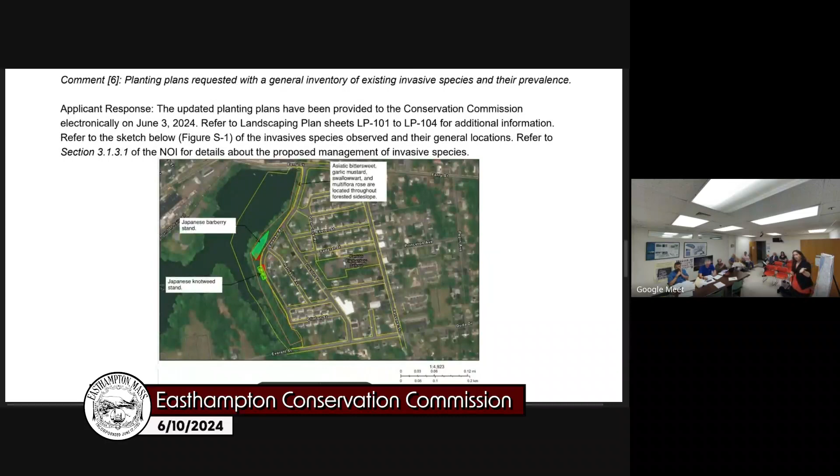Planting plans were requested with a general inventory of existing invasive species and their prevalence. Here we have 2 areas with larger concentrations of invasive species: the Japanese barberry stand in green, and the Japanese knotweed stand in lime green. Honestly, the rest of the slope has a lot of invasive species in it too, including Asiatic bittersweet, garlic mustard, swallowwort, and multiflora rose, located along the entire path of the forested side slope.

So there will be an aggressive management of those invasive species with replacement by native species.

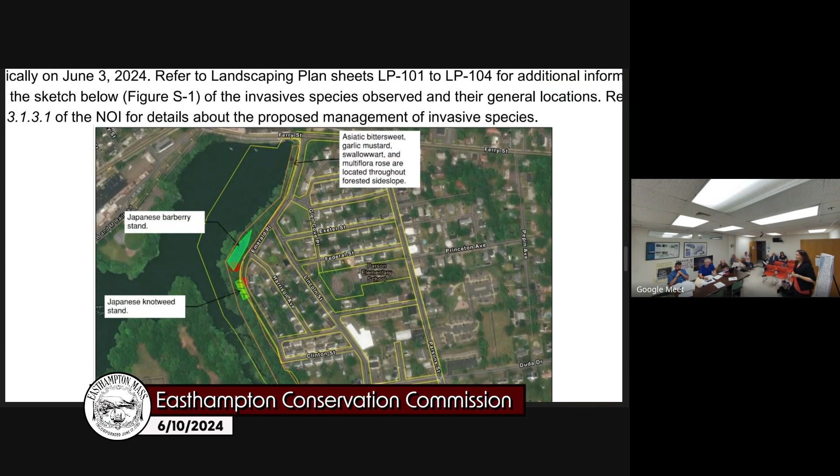Yeah, thanks. No, you're fine. Zoom back out a little. There we go.

And then the snow storage plan. Right now, under existing conditions, the city is trucking snow in larger storm events from this bank so people can park here, bringing it to this apartment parking spot and placing it in the center. That will remain under proposed conditions, because there is no other feasible location along this roadway for significant storage.

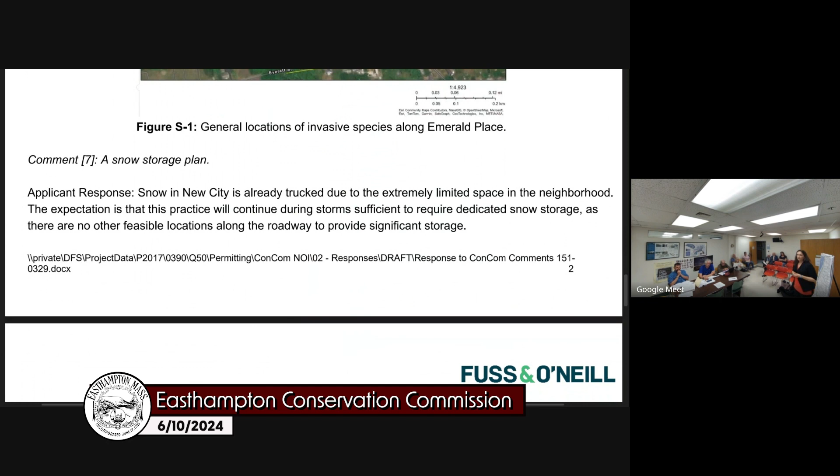And then Cassie, if you want to scroll down a little bit. Yes, I feel like there's a little bit more to that. Nope, there's not. Okay.

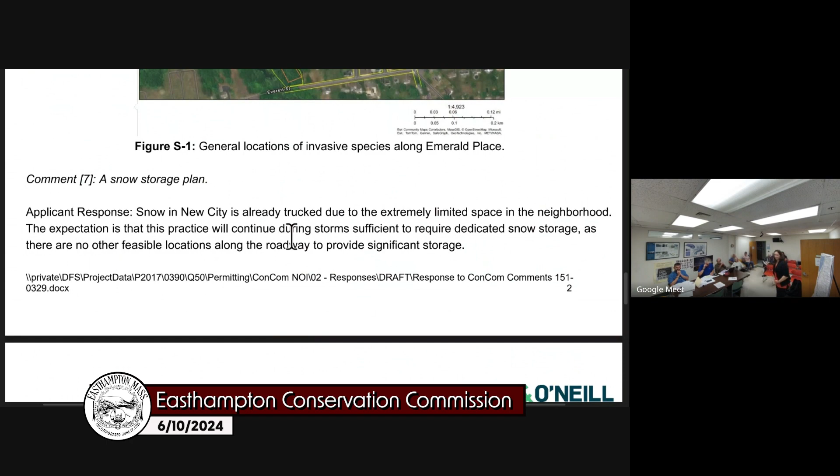Okay. I think that covers most of the questions that we had, right? There was one other question about ADA compliance and dam safety. Was that something that was...

I remember, if I can, someone had asked if the new bridge, because they're proposing a pedestrian bridge along Ferry Street, if it would be ADA compliant and how up and over it would be. I think maybe Sarah, you had asked about that potentially. I don't remember, sorry, but I don't know if you want to speak.

So no problem. Yes, the bridge is definitely designed to be ADA accessible, and it will be in the same time period as this June 30th deadline. We will also be applying to the Office of Dam Safety. We've had pre-application meetings with them already to go ahead and request that permit. There are no negative impacts to the dam, which was the issue that was discussed. So yeah, okay, that's it.

Any other questions from commissioners? Well, let's see, so the drainage report now, do you want to just walk us through the drainage things? We're at 75%. We have the report. Yes, so I'm going to start from the north.

I just realized these are, I guess I'll do it the way we've been doing it. So here's the north, right? So Emerald Place, and we have the multi-use path, and that's the bridge. We've also elevated it, thinking about stormwater, above the base flood elevation so that we're staying out of FEMA regulations.

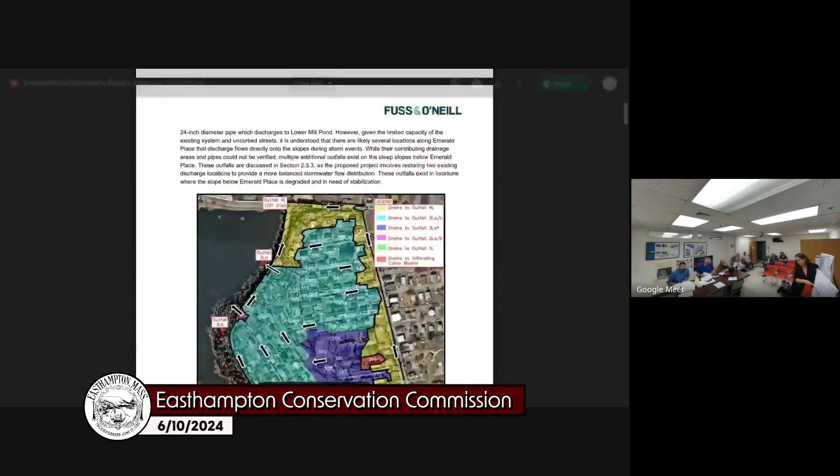So all the yellow, as I go down the road, is stormwater. This stormwater is heading towards Ferry Street as it does today. And then this orange here is the soil nail wall, and you can see it's only extending 12 feet, whereas before it extended all the way to the base.

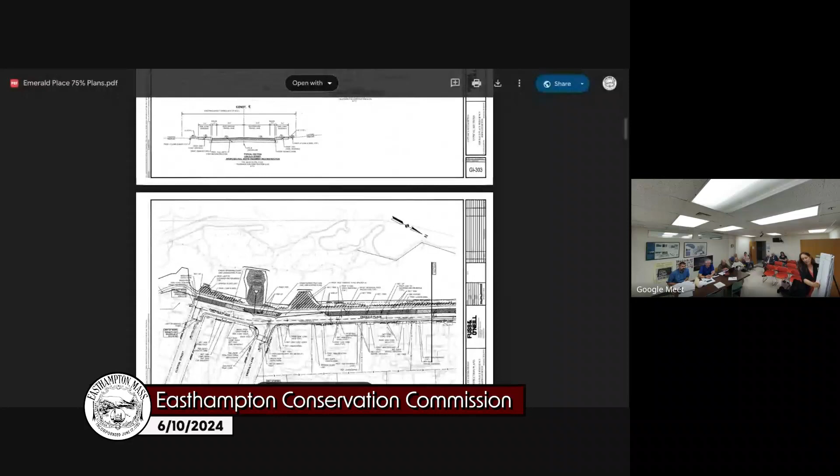And then from the south, this portion from Lincoln Street is going to be collected along this new storm sewer and then draining into this existing outlet. This existing outlet control storm sewer is a 24-inch, and though it's not labeled here, I believe it's a 36-inch that we're putting in. We're upsizing that for increased runoff from future conditions for 2070 flows. Moving farther down along the street.

So the yellow is a little bit easy to see here. We're kind of thinking about this watershed, this smaller sub-basin right here.

Now the next sub-basin is going to be one of the new energy dissipator pools we're proposing, a set of rock boulders that go along the slope here. That's this watershed right here, with new stormwater pipes or storm sewers draining to this new rocky outfall. There's an existing 12-inch pipe there today that we'll be replacing. This is where the slope is already seeing a very large gully with significant erosion, so we're formalizing that outlet.

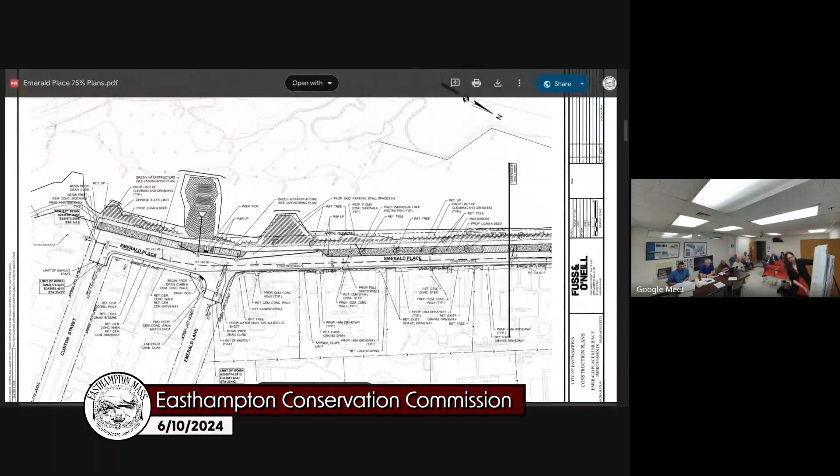Moving farther south, we have the first of our... this is also heading that way. We have a bioretention area here. We are not infiltrating along the side slopes because they're steep, and it's not recommended to infiltrate on steep side slopes, but we are going to be slowing down the water and treating it, then allowing the overflow to go back into our storm sewer. So that one's heading to the north.

And then here's that third watershed system. There's two bioretention rain garden areas right here next to the formalized outfall. And then here's the new stormwater.

This area is where the city has experienced washouts and a significant pothole—well, a sinkhole—right here along the side of the road. It's because there's a significant amount of water coming from Clinton and Emerald Place, Emerald Lane, and there is no formalized location for it. So we're hoping to slow down the water here, and knowing there will be significant velocity, we're again proposing these step pools.

So that's kind of the overview. We've sized all the storm sewers for the 2070 10-year storm event. We've run HydroCAD analysis for many different storm events, from the 2, the 10, the 50, to the 100, for both existing conditions and 2070 flows, to show that we're meeting the stormwater standards and reducing or meeting those flows.

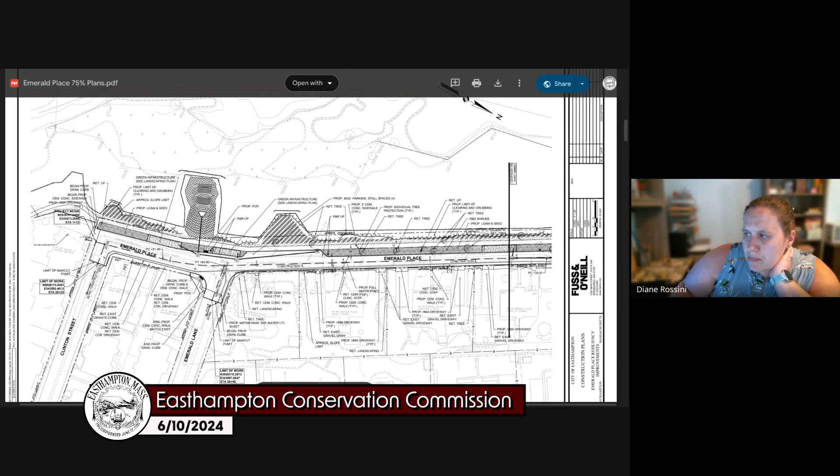I think you're looking for page 11 of the PDF. Okay, hold on, let me see. It's the rock cascade and energy dissipation pool design profile. No, we're looking for a detail though. That is what we got. Okay, hold on, I can share this. So it's page 11 of the PDF. Thank you.

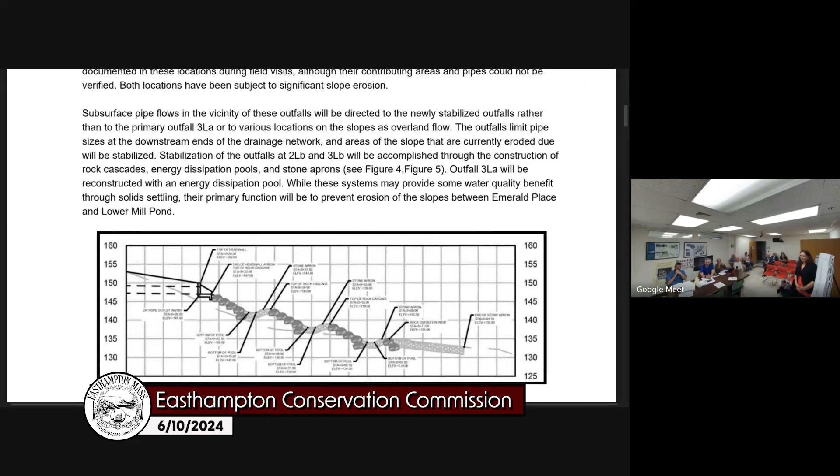Oh, here we go, got you. I was looking at the wrong thing. Let's see when we zoom in how fuzzy it is. But you can see here, the idea is that you have these boulders coming in as the flare down section comes. You've got a cascade pool, or settling pool, and then the rock cascades, and then a stone apron at the bottom.

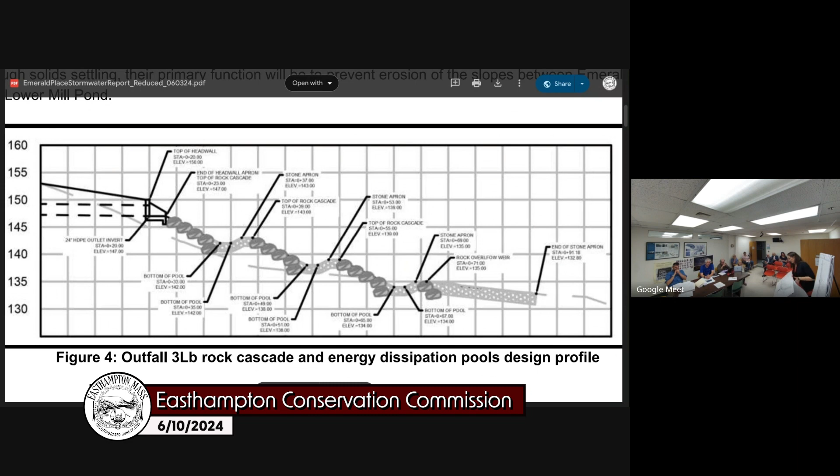So like the one we're looking at now, there are a couple that are similar, but this one is where the many steps is really big. Actually, I believe this one is only 2 steps, which is interesting, but that's because we've formalized this and will have a larger storm sewer here. The other one that's farther north has 3 steps, which I think is what we're looking at here, at the bend, just south of Harrison.

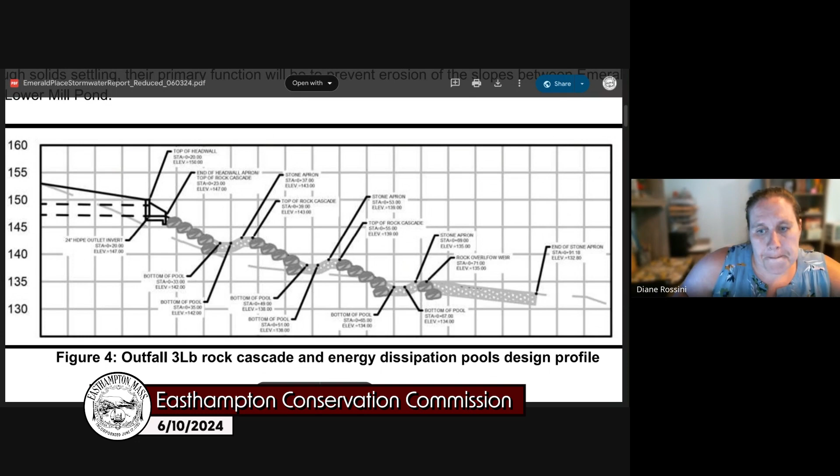Anything else? So at this point it's nearing final-ish design, then the funding is done, then it's the city applying for more grants and figuring out how to finish it, and bid it, and what phasing and all that sort of stuff.

I guess if we were to, we need to rough out some conditions also. I don't know, Cassie, if you have conditions already in mind, but the ones we typically like to discuss are monitoring during construction, which the commission typically requires - a third-party monitor or a monitor proposed by the project as a pre-construction requirement. We figure out who that person is, make sure they have the proper credentials for SWPPP inspections, and then that they would do weekly monitoring and after every 0.25 inch rain event.

What's that, sorry? There's weekly monitoring. Yeah, usually it ends up being weekly anyways, so those two things, and then...

I'm thinking about if there are changes that happen in between this design submission and what goes to bidding and construction, and also just making sure the commission's in the loop on what the phasing is and those kinds of things.

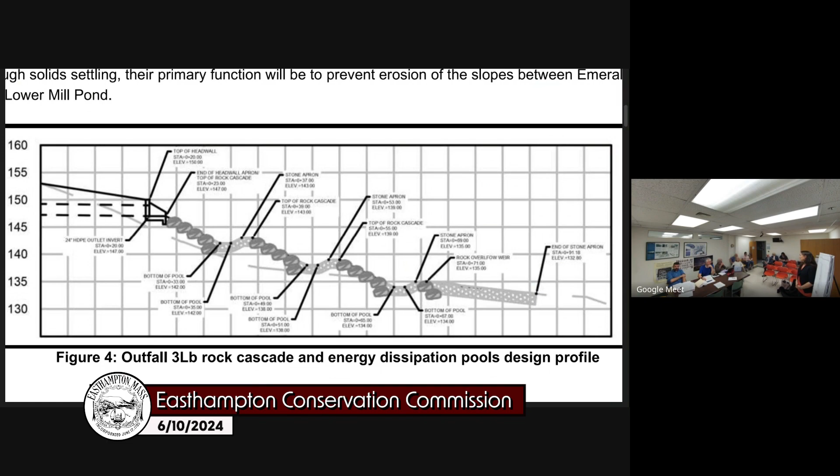So you're applying for some funding at the end of June? Diane, do you want to speak to the funding sources? Funding wise, no and yes. End of June is when this MVP grant is up. The next MVP funding round application will be due next spring, so we'd be applying then. Hopefully we'd get some MVP funding and try to pair it with maybe some CDBG funding or other sources, but a lot of those grants we'll be applying for in the spring. So it probably wouldn't be next construction season, but the season after, if we get that funding, that's when we'd be starting construction.

Okay, so if we end up issuing something now that's for 3 years, they'll already be at least 1, if not 2, years in before you can even start it. And then how many — because you can ask for a continuation, an extension, right? Is it year by year at that point, or is it another 3?

I think it's year by year, right? You can do it every time the commission extends a permit — they can extend it for up to a period of 3 years, so you could get another 3 years. There's no limit on the number of times the commission can extend a permit either, so it's at your discretion how often you want to do that. We do have projects often ask for 1 year if they're close to the end, but in this instance, they'd probably go for the next 3.

So I guess what I'm wondering is whether it makes sense — I'll say that a lot of the funding sources are looking for permits to pretty much be in hand for the construction projects, just so they know they're ready to get constructed as opposed to having to go through the permitting process. That makes sense, yeah. That's part of why we did this now.

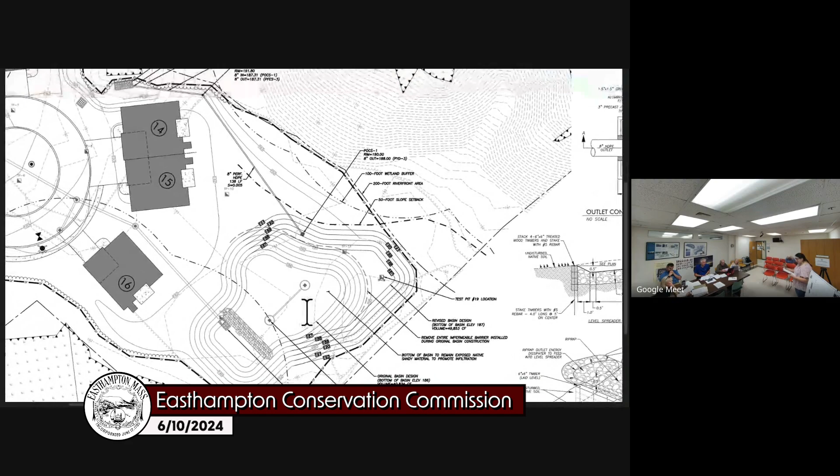So that was the original back and forth with the previous city engineer, but I know we've received final comment from the current city engineer based off of those responses. So that was great, they kind of... oh, sorry about that. Okay, I think it was good to review.

Since then, we have received from Diane Rossini that basically it looks like it meets the required standards. She has the following comments related to construction design on the system. Is my understanding that the fill to raise the grade of the basin to 187 will be a well-draining soil that will allow for infiltration. Also, for any work in the infiltration basin, care should be taken to minimize any compaction or introduction of fines that would impact the function of the basin.

Next comment was the basin should be protected during construction from any construction stormwater flow that would impact its functionality in the future. Next comment is the level spreader shall be situated and graded so that it can manage the velocity of stormwater flow effectively. Based on conversations, it is my understanding that there will be a stilling area within the level spreader that will be properly located and sized to do this function. The flows from this pipe should be relatively low, so this should be adequate from the energy dissipation required.

And then the last comment she had is the owner contractor should keep the city engineer apprised of the construction schedule for drainage work so that if she should so choose, she can come out and inspect the work.

Thank you. No, it's okay, sorry about that. That's helpful, sorry for that. Yeah, okay, yep, it was helpful.

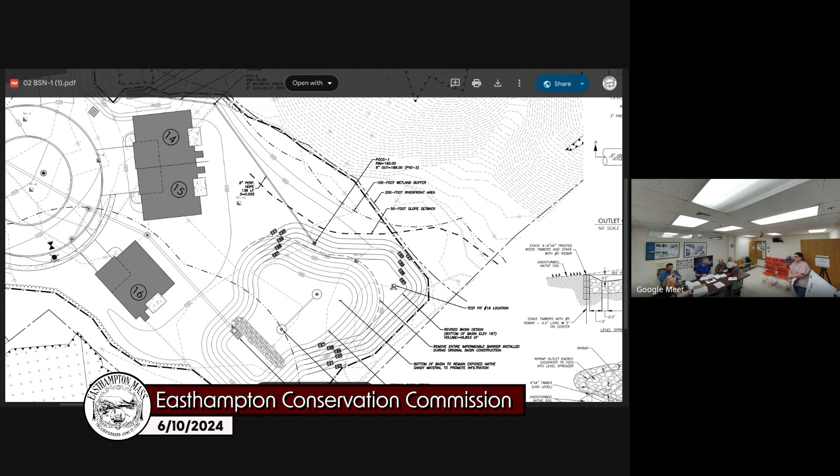Going back to one of the comments related to something we raised at the last meeting, about whether it won't have to drain - currently it has to drain 4 to 5 feet and will only have to drain 1.25 feet. The drawdown analysis was revised to show that using C-type soils per the Rawls rate provided in the stormwater handbook, it will drain less than the 72 hours required. Do you know how long that drainage time is? It was 71, I can look it up, but yeah, 71. Just barely. Yes, okay.

Do you still feel like it's appropriate to be a minor change? Yes, with administrative approval. Potentially, if you choose to accept it. Dan, any concerns from your side? No, I don't think so. It's a minor change. Okay.

All right, are we ready to go ahead and approve this for construction? I'm trying to get this thing functioning. Sure, okay.

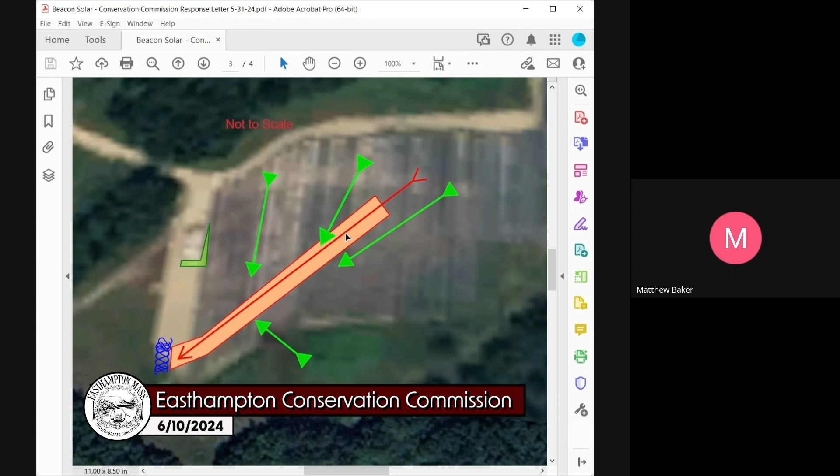Correct. And then, with the water that is still on site, has it not evaporated or soaked through, percolated through like normal, the anticipation is to pump into a discharge line through filter fabric or filter sacks, push it up gradient so that it can fall back and clean itself out and move downstream once we get that channel installed and get the BMPs in place.

So where are you proposing to put the filter bag? Right now, water is standing. I don't know how well you can see the cursor in the hand. You can see it. Sorry, I'm running remote on a different computer. I've got my new one coming in tomorrow.

Yeah, the water's kind of standing up in this area, all the way up to the end of this red arrow. We're anticipating filter bagging it and sending it up gradient so that it falls through the vegetation and slows the velocity naturally as it gets back into the channel. We just want to kind of push it along and get it moving.

So aren't you going to be just putting the water right back in the path of where you're trying to do construction? Typically not, no. It's going to route itself because we're going to have part of this installed up to the point to where the high point is that's holding the water back. So we'll get this cut up to where we can get past that and the natural fall falls in.

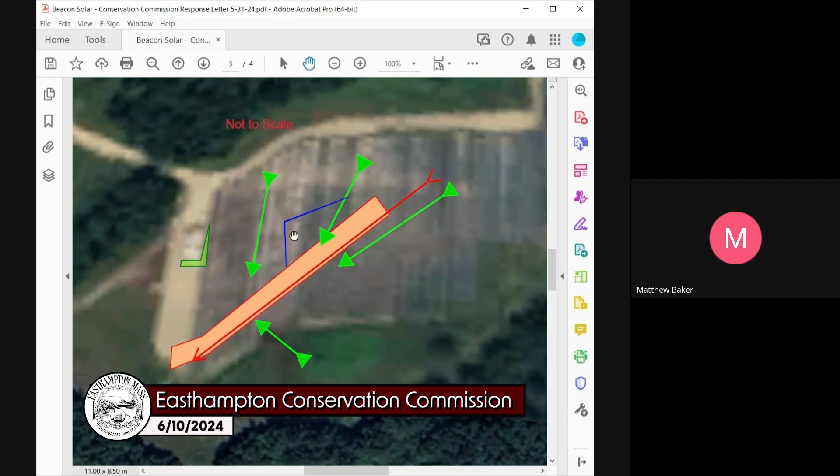So you're saying you're going to build the part below down gradient of the blue line. That's correct. And then pump from above it up towards the green arrows to the top of the screen and let it flow back into the already built portion. That's correct, yes, once the BMPs are in place.

Okay. And all of this is happening in amongst already installed panels, correct? That is correct, yes, ma'am.

Questions, comments? Sounds fine to me, I guess. I think this is reasonable. We went out there and we looked at it a few weeks ago. No issues, no concerns. I don't think so.

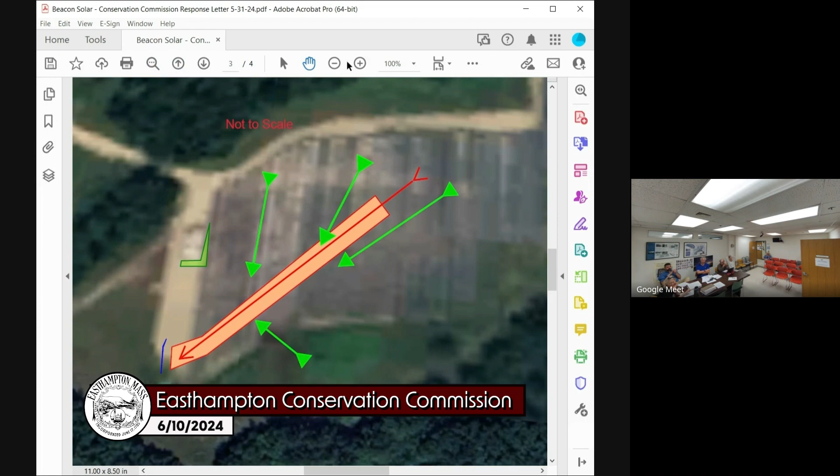My only main concerns are just like managing it, so that it doesn't cause erosion. Erosion, where we've seen it in the past, right. It sounds like this would be a good way to capture it and make it slowly go. As far as I can tell, so, yeah. Okay.

All right, are we okay approving? I do have someone here has a question and then someone online has a question, if the commission wants to open up for public comments. Okay, we can take public comment.

Do you want to do online first or in person first? Go ahead, I think the person that's online is in the neighborhood, so they may ask the same question I have with more knowledge. So you want them to go first? Yeah, I think. Okay, hold on just a second. I'll make it so you can do that, Patty. Hold on.

Okay, you now can unmute yourself if you'd like to. Okay, thank you. My name is Patty Cavalli. I actually abut this solar farm, and my husband and I had many serious concerns, and we came to many of your meetings with these concerns about this water runoff and with these issues with excessive water. And we were told that this wasn't happening. My property has been wet since you allowed the installation of these solar panels.

So have you evaluated the surrounding areas along? We're having the same issue that they're having on the solar. So when you drain off this water, I know you're saying it's going to drain to that stream. We abut that stream and it goes into our yard. So have you really looked at all of the surrounding area? Because our concerns, we were guaranteed that we weren't going to have issues.

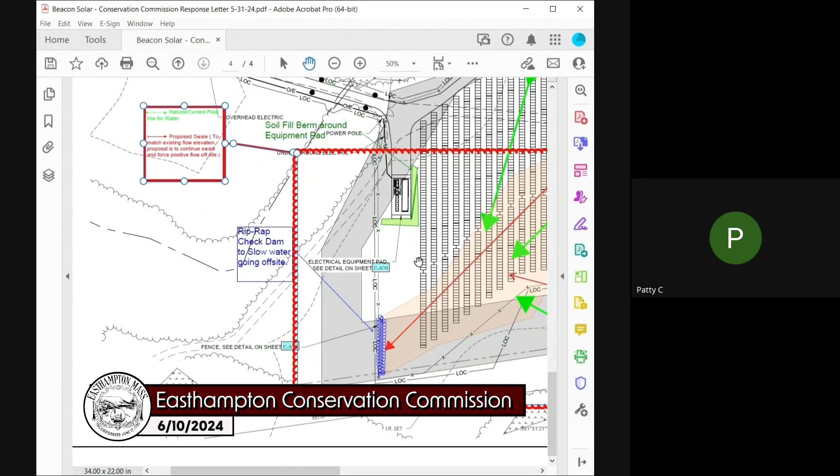And now you're telling me they're having issues on the solar area and we're having issues. So I think our concerns are coming. So are you looking at surrounding areas also? For our work,

Can't say that I have. I know the owners have been looking into it. What owners, the solar owners? But I can't say we have. Yeah, the owner, the owner of the solar company? Yes, yes, he's online as well now. Oh, are they going out and talking to us? Because we haven't been approached at all.

I'm trying to stay calm, but we came to so many of your meetings and we were so concerned about this water, because our point was when they put this in, we were told we were out of our minds. If you put a pillar down, you are disrupting water runoff. That water, that earth where that pillar was, cannot absorb water. So that water has to go somewhere. But we were told that wasn't true.

Well, I think it is true. We're living proof. Okay, understandable, I'm going to. I wish someone from the commission would come. The city council came to our backyard when this, and we were told our house.

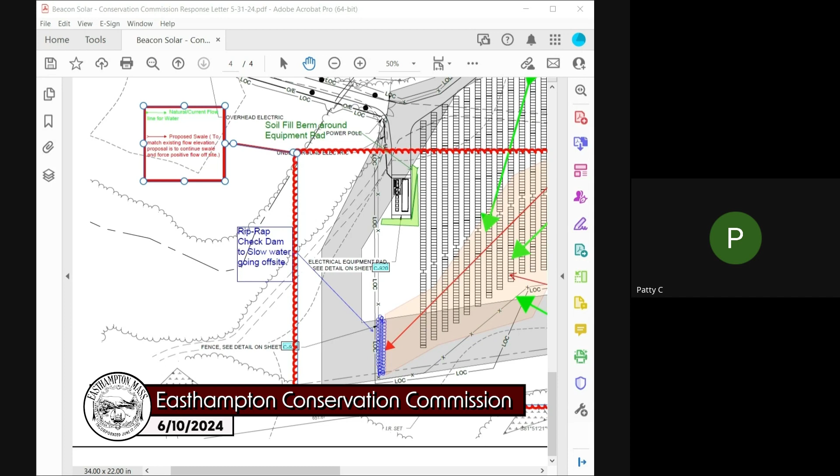What is your address? It's 10 Maxine Circle. We could look at an image of Mass Mapper to see where that is in relation to this part of the property, if that's helpful.

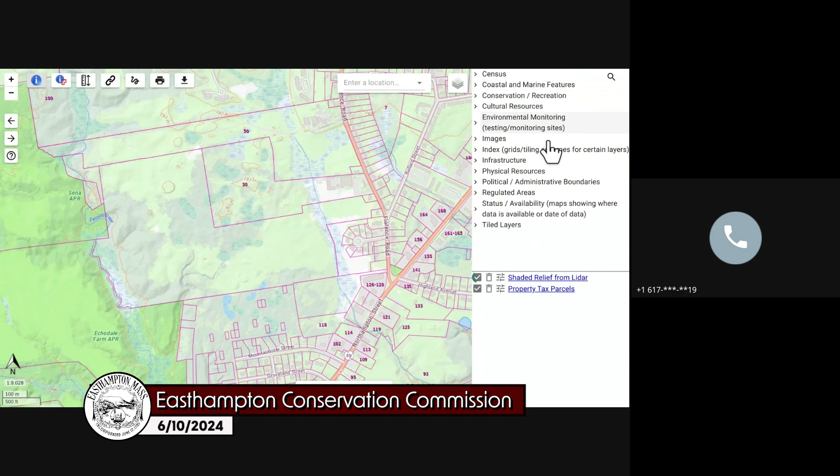I'm getting a lot of reverb, I can't hear what she's saying. It's number 10 Maxine Circle.

Okay, thank you. So here's the shaded relief, which is what we're looking at right now. Just showing — I don't know if this is helpful — you can kind of see how this is trying to show where it slopes down. I can also turn on the topo layers, but this side over here is a flat area, though you can kind of see where the stream might be through that shaded bit. Over here is where I was concerned about erosion, because from this part of the parcel it's kind of going that way. Over here, obviously it wants to go that way on that part of the parcel, but there's kind of two issues here.

It sounds like, Patty, you have concerns about how that may or may not have impacted water on your property. Tonight, what we're talking about, because the permit's already been issued, is this one piece of dewatering for some ponding happening over here on this side of the property.

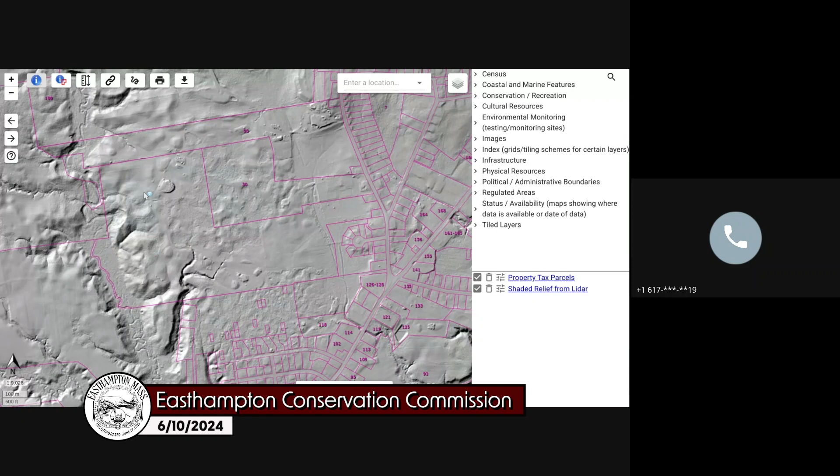Well, you're talking about needing to— We need to continue what we need to talk about, and if you have another comment, we can come back to you.

I think, to Cassie's point, the work we're talking about to handle the isolated drainage issue on the west side of the parcel is not related to the issue the homeowner is talking about — those are draining in different directions. So let's deal with that piece first. If we're comfortable approving that change, let's get that moving.

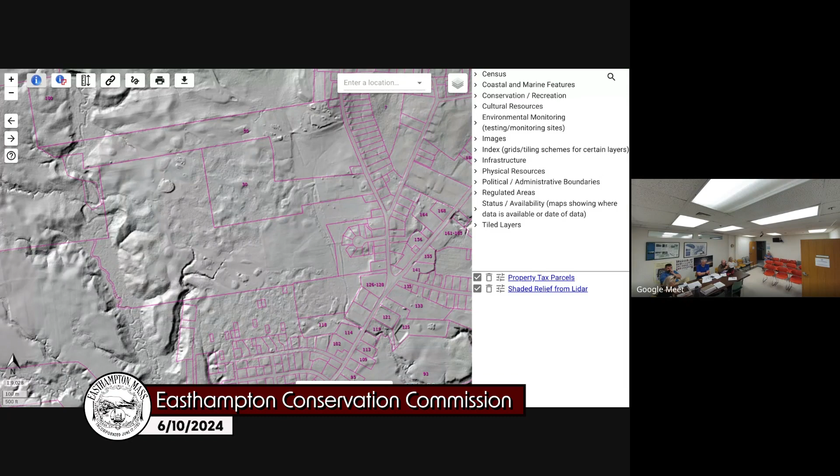Yes. The permit holder is responsible for ensuring there are no negative impacts from their project to resource areas that were not permitted or allowed. So if there are other issues happening, changing drainage patterns in ways we did not approve, and we're hearing that for the first time tonight, that may be a separate thing to talk about, certainly before the certificate of compliance for the project is issued. I also think we're hearing that some of the trees expected to be planted and required in the plans have not been installed — so that's a third issue. But again, they're not seeking certificate of compliance at this point, so they're also not responsible for having finished that yet. Those are the three things I think we have to consider, but the most immediate is the request to modify the drainage problem they're having on site.

As a minor change. Yes. Specifically just the dewatering related to that, right? Right, because we'd already approved the— we actually already approved it. Right, yes, we already approved it. Yep.

I'd just like to add one thing that Matt may not have covered. The area we're dewatering is fully stabilized and fully grassed, with no bare earth. So we're taking water from a fully stabilized area and moving it up-gradient to another fully stabilized area, though not as much. This area is comprised primarily of clay, which is why it's holding water and not draining out, so we're trying to move that water up-gradient to another fully vegetated area, in addition to all the filtration methods Matt addressed earlier. I just wanted to make the point that we're moving water from one stabilized area to another.

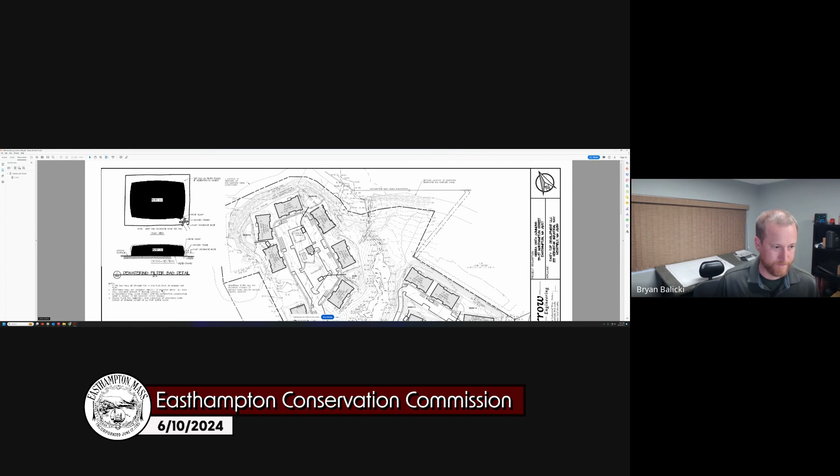And then I have a typical location for how it would be located if needed in each of the instances where we were asked at the last meeting. So for example, if this basin needed to be dewatered, a pump would be placed in the basin. It would pump away from the resource area to the filter bag, and it would then sheet flow across the site to the erosion control barriers.

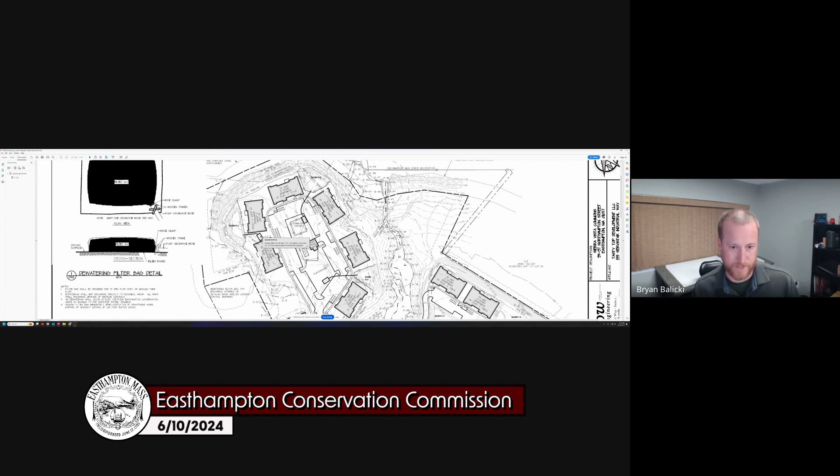So you'll see there's a location for each of the detention basins, and then one for each side of the bridge crossing. I tried to locate them in logical locations outside of the 100-foot buffer zone. I think they're all reasonable locations because the stormwater management will be installed early in the project before most permanent infrastructure is in place, so it wouldn't be out of the question to have the filter bags next to this building, for example, or on the pavement edge here. That was our thought process.

Bryan, basin F3, it looks like the filter bag is very close to the edge of the basin. Is there a reason that location was selected? Yeah, because the natural grade, the existing topography in the background, would actually send the water towards the erosion control barriers and towards the downstream runoff.

It wouldn't short cycle back into the basin. It kind of looks like it would, but the existing topography would shed it away from the basin.

And what is the distance between those bags and the wetland line? Everything's outside of the 100-foot buffer. That wasn't my question—can you please tell me the distance between each filter bag and the wetland line? The ones at F3 and F2? This is 100 feet right here, so I'm going to guess they're between 105 and 110 feet. And how far from the top of the steep slope there? 50 plus feet.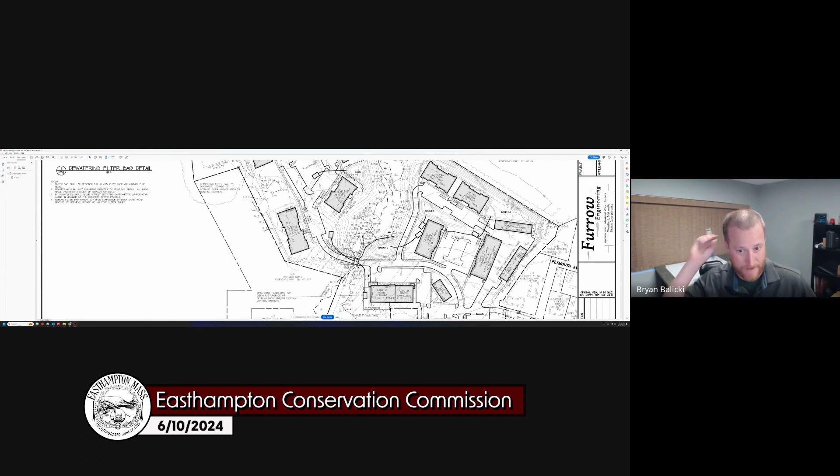Okay, that sounds good, because my primary concern is making sure it doesn't wind up eroding the slope and causing a wetlands violation. So I would prefer to see some temporary grading if necessary than have to deal with another situation we've been dealing with at Loudville. Understood.

So this is for the first side of the crossing here—this one will get discharged into a relatively flat location. And then this is the other side of the crossing. Based on our conversation we just had, I would assume we want to relocate this one a little further away as well. Yeah, I think that would be preferable.

I'm a little bit, in some ways, less concerned with these ones, because with the basins we're talking about potentially dewatering a substantial amount of water heavily laden with sediment. With the culvert, we're really talking about just an emergency backup to pump water out of your small excavations for the footings. So I think we're going to be dealing with a lot less water, but yes, if you could push those further back, that would be preferable.

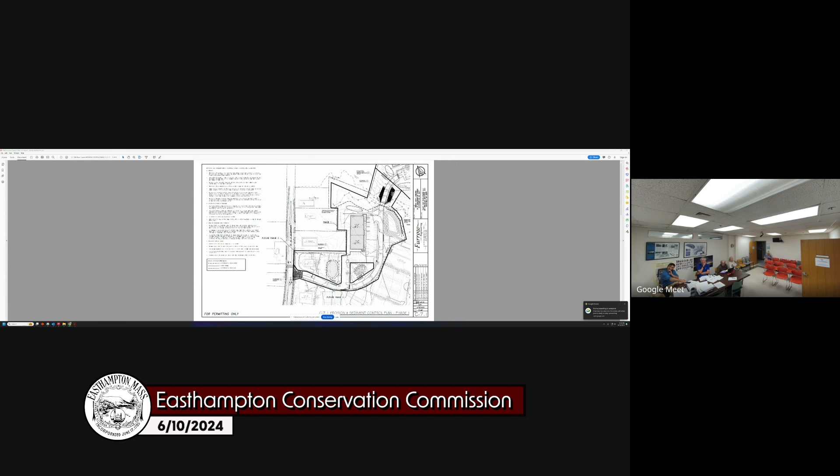Can we see my screen again? Yes. So we had our sediment—I put it on the erosion and sediment control plan, broken up by phases. This was the original stockpile location that was shown, and in error we didn't include more locations for the subsequent phases. So I have a stockpile location shown here for the small portion of phase 3.

And then as we go to the rear site, there are stockpile locations up in the greenscape area, and also essentially as far away from some of the steep slopes and the resource areas as we can logically put them.

And then the same thing for the phases in the former driving range—we have them located in areas of grass, so they can stay where they need to stay for the duration of the new site prep work.

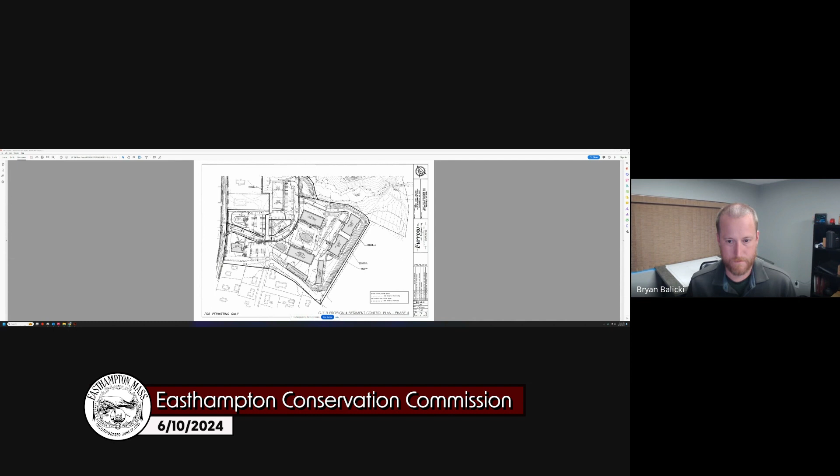I don't have any concerns with those comments from the commission. Okay, we're good with that. Thank you, and I think those were the only two that had new items related to it.

Just as a note, for the performance bond, we're still waiting for the actual final signed bond for when they actually get closer to work, which makes sense. And they understand that it's their responsibility to keep that updated as needed.

And the other item is the MEPA status. It sounds like you were thinking in August you might get the final certificate. Correct me if I'm wrong, Bryan. So we don't have that yet, but we expect it by August 2nd, I believe is the date.

And then the last thing is establishing the commission's consultant for the monitoring during construction. So just as a quick update, I have issued that RFP based off of the corrections you guys wanted me to incorporate. I've solicited 13 different firms.

I've heard back from 4 of them confirming that they do plan to submit. Hopefully they will actually do that. And then I've gotten maybes from 3 others, and the rest have denied. So kind of just waiting, still well within the period that I would expect to not have received any yet.

The due date is June 20th, and I will share that with you all as soon as I get them, and with the party because you can submit comments on them, Bryan. It is the commission's discretion on which one they choose. Oh, wow. Right.

Thank you, Kathy. All right, do we need to take formal action on that? No, I think you've approved both. Yep, I'll put that in the minutes.